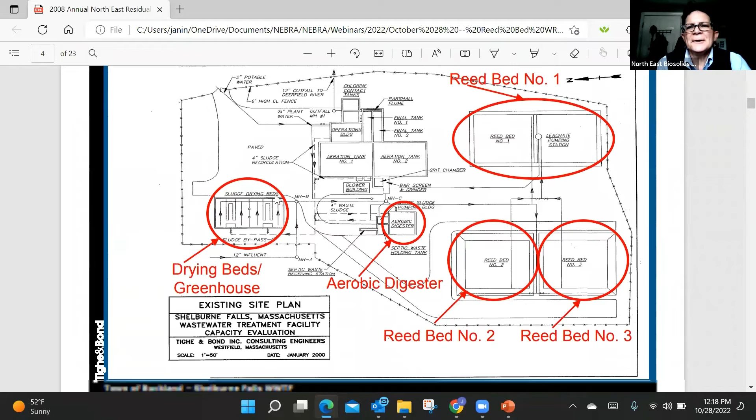This is good. Okay, so the circle on the left is the drying beds, which, before we had the reed beds, we put a greenhouse enclosure over. That actually helped out a lot because it allowed us to dewater even during the wintertime. It would still freeze, but we could get the sludge cake off before it froze down to the sand.

So we've got the aerobic digester. Initially, when we put in the reed beds, we changed from the surface aerator to diffused aeration. We initially had coarse bubble diffusers, which worked pretty good. The blower was a little bit oversized, and since then we've downsized both the blower and changed from coarse to fine bubble diffused aeration. We also increased the number of diffusers we had. So now we've got the same size blower in the aeration tanks as we have in the digester, with circular diffusers in the aeration tanks and tube diffusers in the digester. Now we've got a pretty consistent, well-stabilized sludge for going to the reed beds.

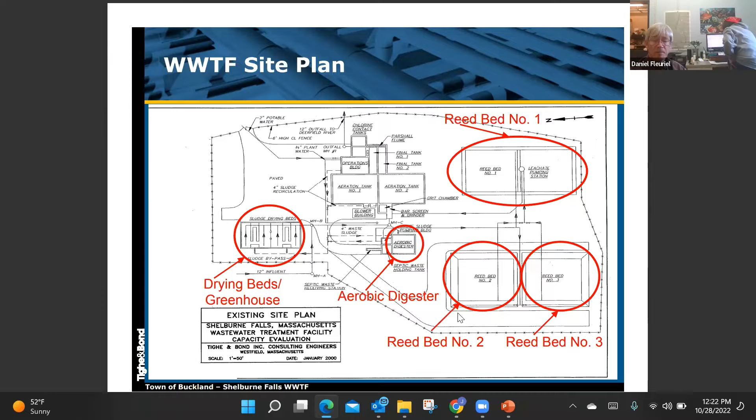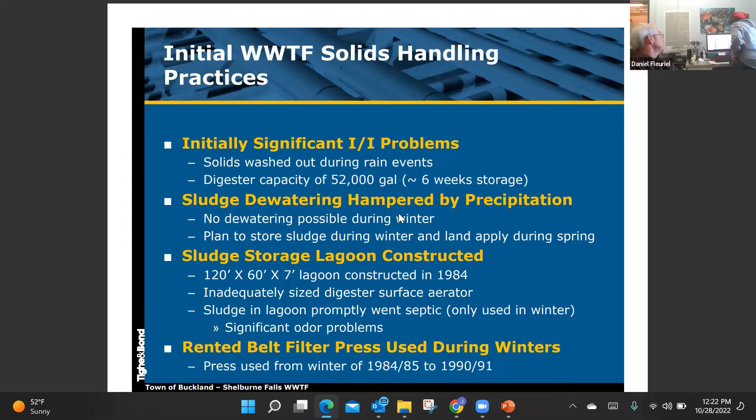Let's see, do you have it? Weekly. There we go. Okay, 10,000, yeah. So if you want to bring up, going to the reeds. There we go. Is that this year? Yeah.

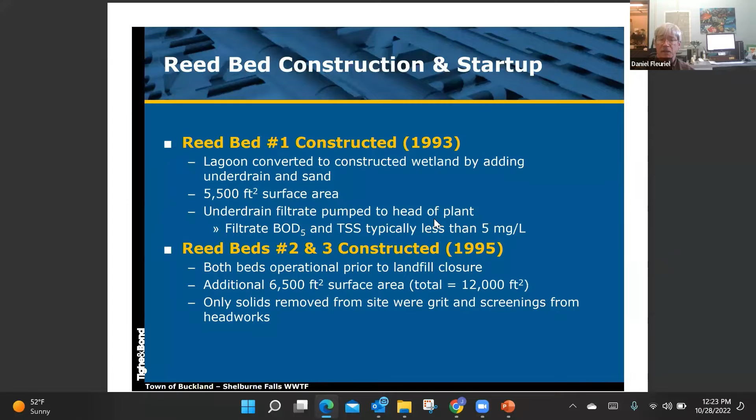So total sludge production has been somewhere in the range of 350 to 400,000 gallons per year. That's been pretty much what we've been doing right along. Our sludge production hasn't really changed much in the last 20 years.

The way we do this is to give the digester the best opportunity to get the sludge as digested as possible. We're on a 3-week schedule. So if we start at the beginning of the cycle with a nearly empty digester, we don't empty it right down to the bottom. We'll leave 3 or 4 feet in the bottom. And we'll waste for 2 weeks, which will fill the digester.

And then the following Monday, we will decant off the supernate and thicken it. And then we'll apply sludge to the digester for another week. And then after the 3rd week, we'll decant on the following Monday. And then that Tuesday, we'll go to the reeds. And that will, when we go to the reeds, we'll take out about 3/4 of the volume of the digester.

The only thing that we have for adjustment is as the digester is, biology is happening, it has a tendency to use up the alkalinity. So we'll use hydrated lime and we'll just dump that directly in, and that does a pretty good job of maintaining the pH. The bugs stay happy, and it doesn't really add anything to it that we're really concerned about. It's hydrated lime, most of it dissolves.

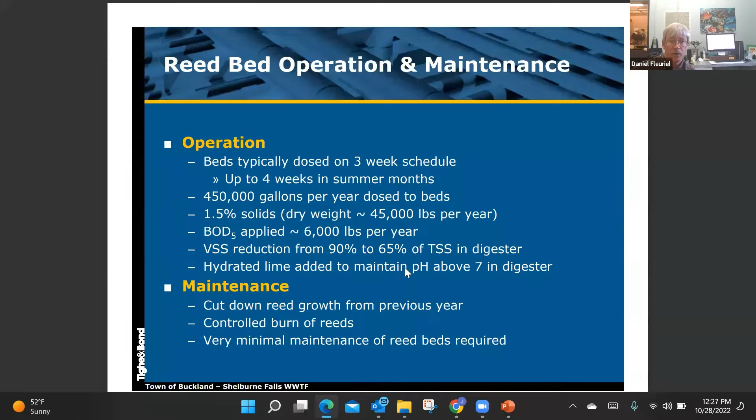It flattens out on the whole thing, and we don't have to do anything exotic with the distribution system. When we did the second and third beds, we had it come down along 4 sides, but we found that was unnecessary. Now it pretty much dumps out at one point in each bed, and it's fine.

But the only thing we do is get it away from the edge, because the edges of the reed beds still have the hypalon liner, and we don't want to risk burning a hole through that. Burning it is pretty quick and a pretty clean burn, and then any of the ashes will pretty much stay right there in place.

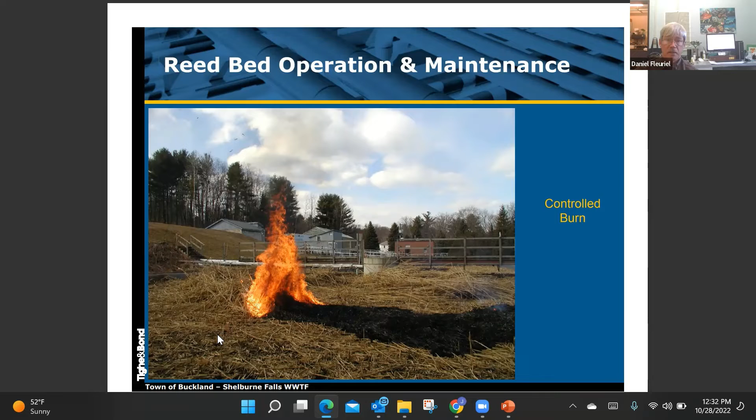Right, let's see, go up to the next one, let's see.

Okay, so this is when we first started the reed beds, we had some minor issues. The reeds themselves are apparently delectable for aphids, and the aphids would really ravage the leaves. So we got some ladybugs in to eat the aphids.

And that kind of went two directions. We ended up with a lot of ladybugs sitting here eating aphids, and coincidentally there seemed to be in a neighboring town an abundance of ladybugs climbing all over any white house in town on a few specific fall days. I'm not taking credit for it, but I can't rule out that it might not have been some of our escapees.

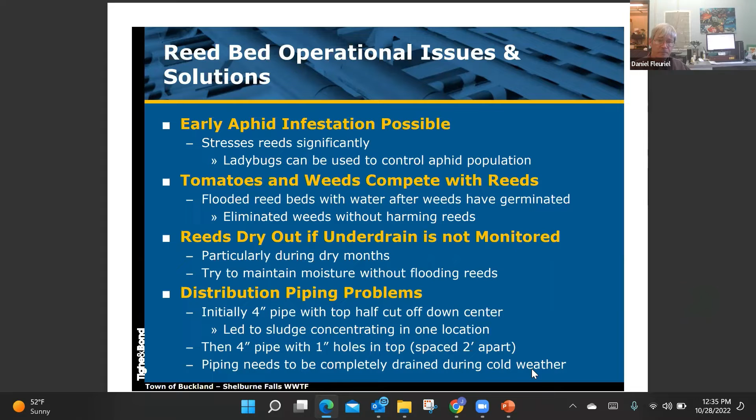When we go to the beds, we're pumping with a trash pump, and we'll crank that right up. The typical application to the three beds is somewhere in the range of between 28,000 and 30,000 gallons per application, and that will happen within probably 4 hours for all three beds.

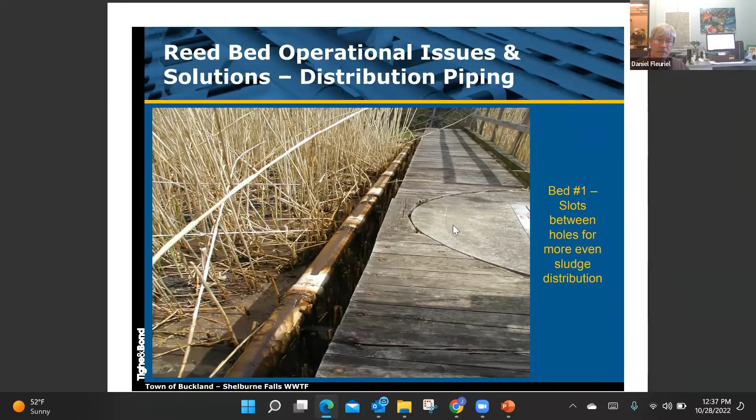Once we break it down, we basically have nothing to do with sludge dewatering for 3 weeks. Comparing that to the sand drying beds, to keep up we had to do an application every week, and we weren't getting quite as thick sludge. We were usually doing about 12,000 gallons to the sand drying beds each week, then 5 days of drying, a day to remove the dewatered cake, and another day to flood the beds again. With the sand drying beds, we were using polymer.

Our process now is once we're done going to the reeds, we'll leave these valves in the half-open position. That way the chamber around the ball is allowed to lose the sludge that's in there, and you don't have a spot where the sludge can build up pressure and break the housing. We'll do that again.

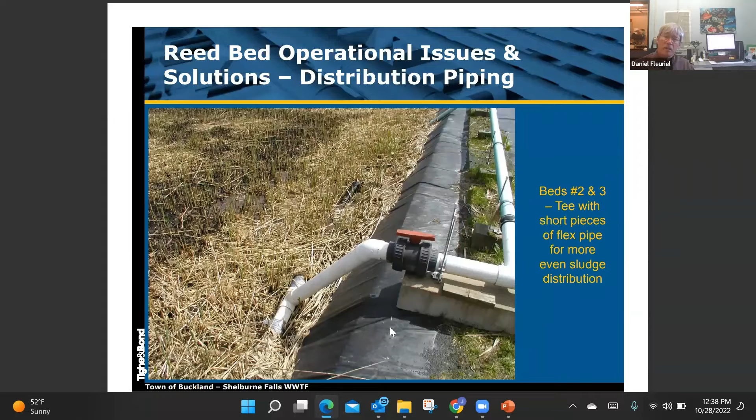So this is looking at bed 2, and bed 3 is in the background. You can see a little bit of an arch to the distribution pipe going to that, so part of it will drain into the beds and empty out. The way we do it is we'll start with beds 2 and 3, applying to these two here, and then when we're done with these, we go to the first bed, which is off view down over the banking to the left. Once we finish with that one, we can allow all of the lines to drain empty.

On the right-hand side of the screen, we have a diagonal pipe coming up along the slope, down a little bit. There we go. So the underdrain system is vented, so that we don't end up with an air pocket underneath that might trap the filtrate from going down into the underside.

This lets any air out, and then we don't end up with any bubbles coming back up through the sludge application as we've applied. This is in the spring, early in the spring.

We've already cut down, and you can see the black area. That's some of the leftover ash from burning. And closer to the edge, you see a bunch of the leaves that are still there.

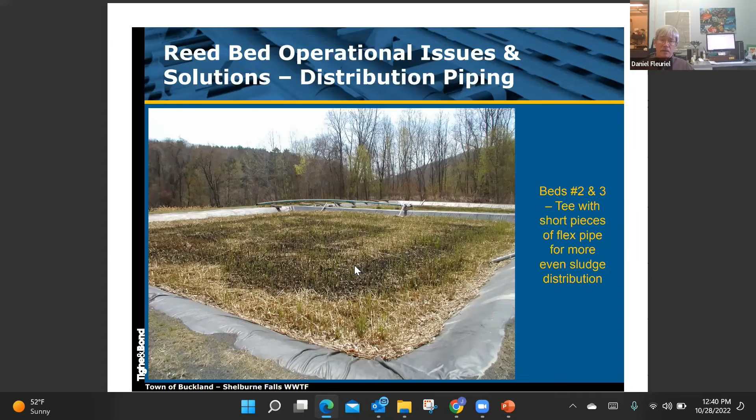We have a good water supply down here. We've got the town water's 150 PSI, and we use town water to stand by with hoses around the side, so that when we do burn, we wet down the plastic beforehand, so that we don't get that bubbling and curling from radiant heat. We'll also wet down the areas outside, because all of that will have dry tinder in there.

Let's see, we can go, all right. So we really did have a sweet deal when we still had the landfill open. I think they were charging us $7.50 a cubic yard for the land volume value, which was an unrealistic number.

Okay, so let's see, fall of 2007. To excavate the first bed in the fall of 2007, we had no really good way to reach all the way out to it. We got a hold of a long reach excavator. It had a 55-foot long boom. It looks real weird, but it was able to reach out far enough into the bed.

We also had a second excavator, a smaller one, that was going out and working next to the bed on the far side and transferring it to a point that the other one could reach. And then from there, it was being loaded into trailer dumps, and the trailer dumps were going up to Casella's landfill near the Canadian border.

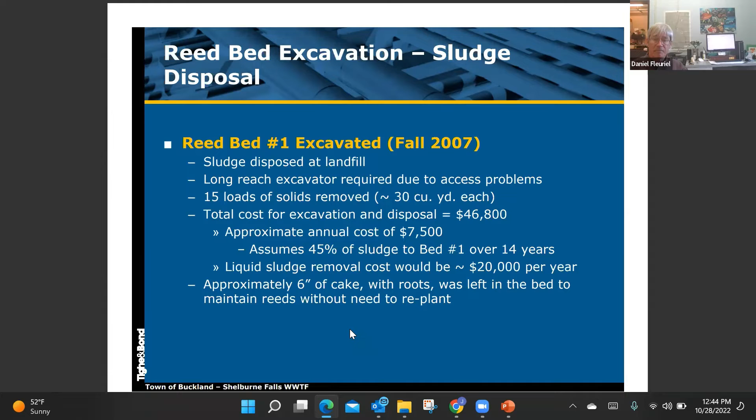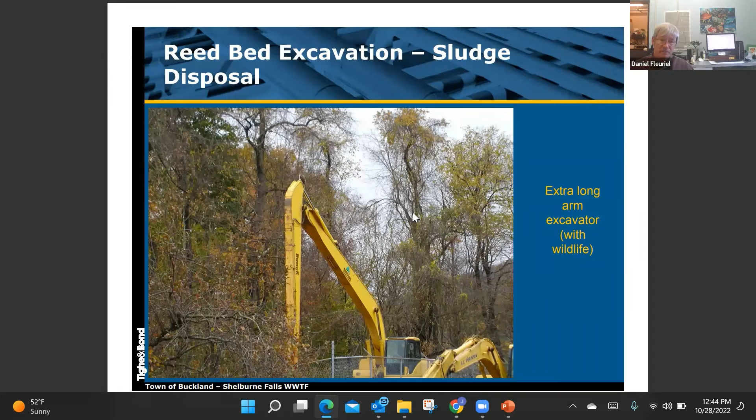So we're now, okay, there's our long reach excavator, and we've got, I don't know if you can see very well, there is a red-tailed hawk perched on the very peak of it. You can just see a little bit of the white of its breast there. It was scoping out the area and keeping an eye on things.

And then this is during the excavation. We've got the small, initially, so that the operator could see what they were doing, we used the skid steer with a bucket to knock down the reeds, and the other excavator there we were using to transfer to within reach of the large one.

The material was brought down, not all the way to the sand, although it did get exposed a few times. We left a little bit of the cake there so that we would end up with some roots staying in place. And then we did not replant after the initial removal of the cake. We just let it start growing the next year.

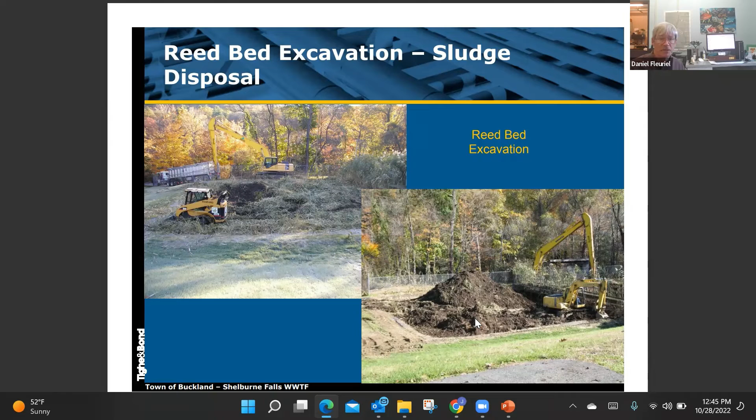The skid steer there, okay, this is what we looked like after the winter. There are the new reeds coming up. You can just barely see them there. This is probably the end of April. We've got leaves on the tree already. So end of April, beginning of May.

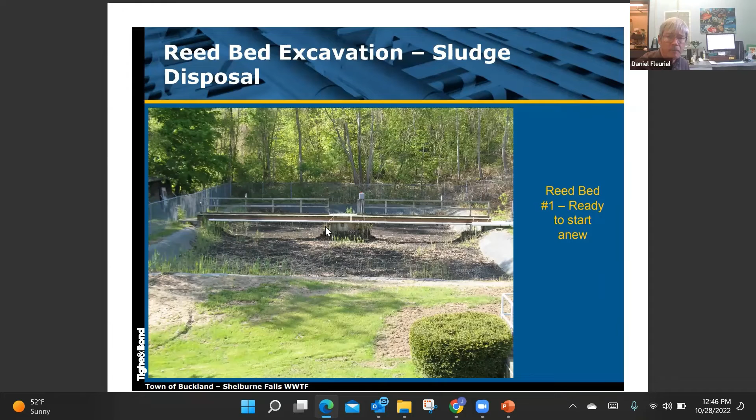And when we started, the cake was, I think you can see at the, under the catwalk there, there's actually a little bit where it was still at the level of the old, yep, that's as high as it got up to when it was full. And so if we go next slide.

I was hopeful to get a hold of a sod farmer. We have a few sod farms in the area, Deerfield's got some. I brought some material to the person that owned it, but I could not even get a meeting with him to bring the reed bed cake to replenish the soil where they had harvested the sod. They take about an inch of material, mostly roots and a little topsoil.

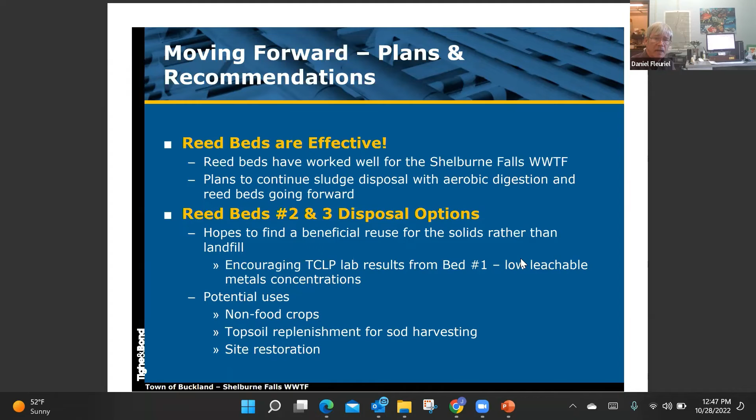We haven't really got any place to bring it at the moment, but what we're working on now, that's what the reed bed cake looks like.

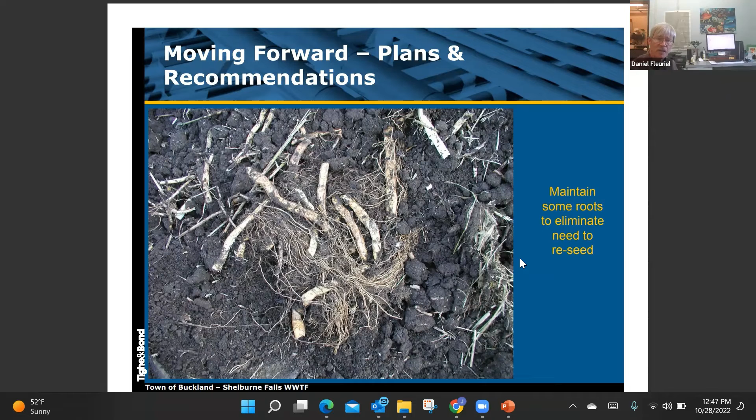Those are the roots, and they're really prevalent below the surface. They grow throughout the layer of cake above the sand, and there's probably some still alive down in the sand. We'll go on to the next one.

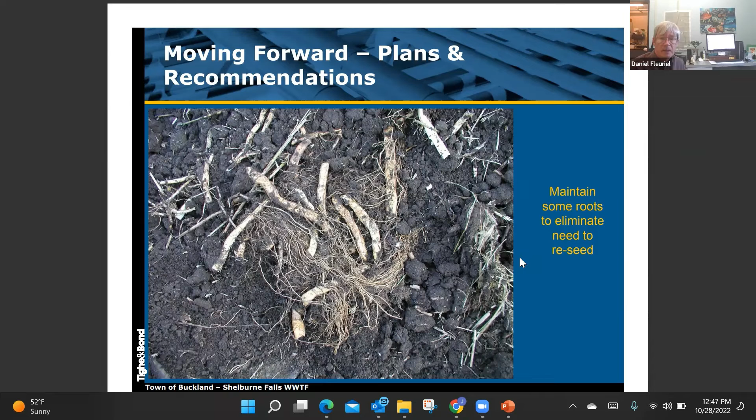I think I've got one with a ruler for scale. That's a 12-inch ruler. The roots aren't quite as big around as my wrist, but they're pretty big.

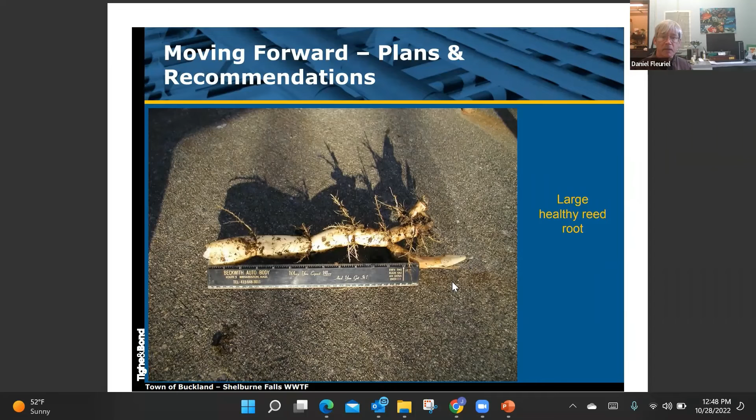About every 6 inches or so on the right-hand side, that's actually going to be a rhizome that will come up, and they're segmented. It's kind of like crabgrass, and they continue to grow sideways throughout the bed underneath. If a reed falls over early in the year, it will send out roots at each nodule and then send up new rhizomes from there, doing essentially the same thing as a root does.